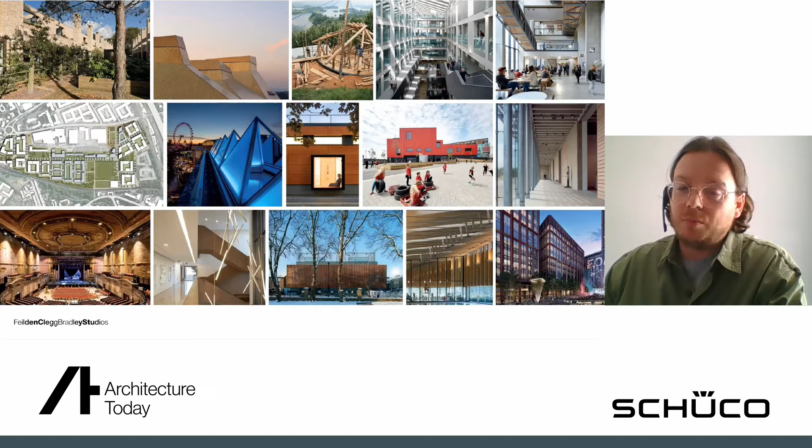At the base of our design, there has always been an eye on low energy design solutions in terms of our buildings, and more recently we've been striving to integrate passive house into new schemes that are coming forward since the declaration of climate emergency. And we've also used our in-house tool, which we've made open source, called FCBS Carbon, which enables us to analyze embodied carbon and operational carbon at an early stage. So as I mentioned, this aligns with our declaration as part of the climate emergency and being one of the founding members of UK Architects Declare.

And this leads us into South Hill, really, which is a relatively new project that came in last year, obviously having strong aspirations to make this a design scheme that is responding and addressing those missions that we've set ourselves, and doing that with a client that is interested in doing so also. The client is Jersey Development Company. They are part government owned and therefore have a very strong mission and response to the climate emergency and environmental strategies that they want to employ on the island in setting a new benchmark for housing with this scheme. And we're supported on a core team by Gillespies, Waterman and Etude in terms of landscape, engineering and passive house respectively.

So the site sits in pink here. It is surrounded by the mount and in the former quarry that is kind of renaturalised, and that green fringe traces up the Glacis Field, which is this park lawn that runs up towards Fort Regent, which is a listed place. This is then bound by harbour walls and sits at a kind of mid-level between that fort and upper level and down to the harbours below, which again are listed places.

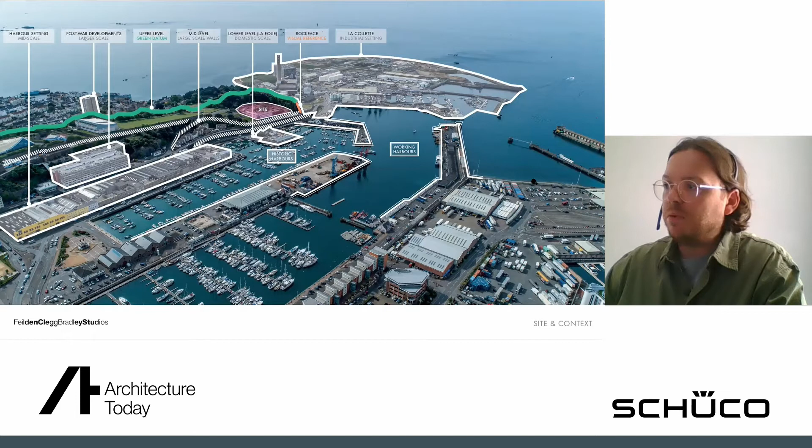On top of that, it then also sits within the working harbours and the industrial land reclamation beyond in La Colette, and amongst a mixed scale of buildings in terms of domestic, mid-scale and sort of newer, larger scale pieces. So quite a difficult place to respond to in terms of satisfying all the different contextual pieces that exist there, but something that we've enjoyed doing in a landscaped fashion, given it's bounded by that rock face and well naturalised in terms of its greening.

And therefore we see it as being not necessarily an urban piece, as you might get in St Helier Town Centre, and actually more of a landscape piece that evokes the thoughts and feelings of the quarry, the rock face, and it can be something more embedded within that natural landscape and greened up to renaturalise and soften the edges as is at the moment. So our response to that was to reinstate the quarried landscape, if you like, and start to recarve.

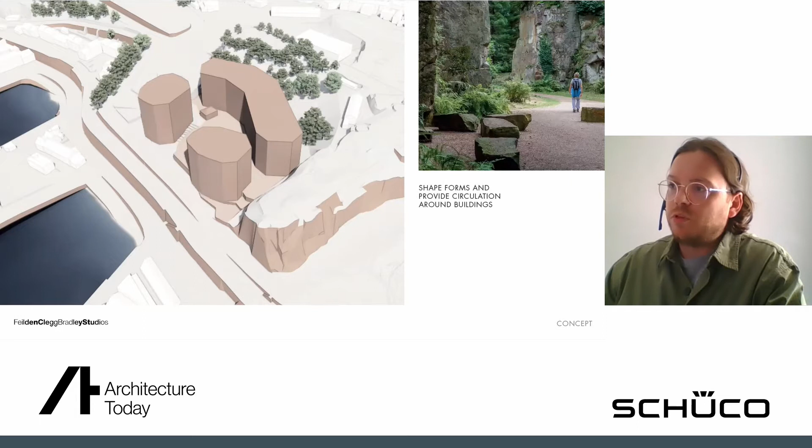The first move was to bring through the harbour in front of the site and create a courtyard space that retains the listed building and starts to open itself out at the back to bring in that view. Then it was about creating an axis on the key views, so bringing in Fort Regent above the Glacis Field, as it's known, and down to Mount Bingham, and having that creation of 3 buildings around a courtyard and listed building. Then we shaped those buildings and set them back to allow for circulation and public realm across the front of the site, around the buildings and through the site into the park.

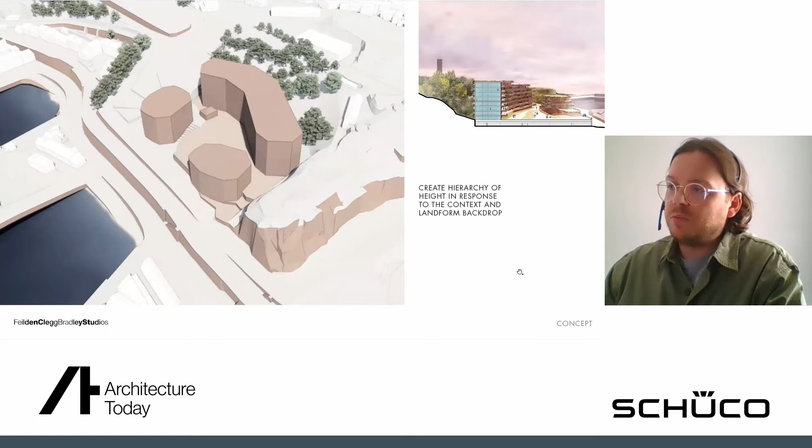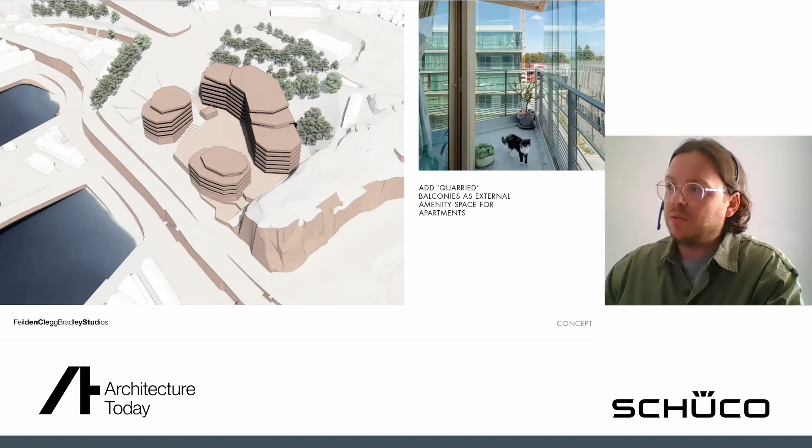We then set some of the buildings down on the front to respond to height and create a hierarchy across the site, and also in relation to that backdrop of trees to the rear eastern boundary of the site. We further manage that height by introducing setbacks at the upper levels, which also enables us to offer terraces to the apartments at those levels. The architectural character is then added through an overlay of quarried horizontals, if you like, which start to offer space and external amenity to those apartments through balcony spaces.

And then the character is developed through a shifting and folding of those balconies and edges and facades to evoke the geological formation of the granite and rock faces from the mount itself. These are then softened through a series of planted pieces through green roofs, planters to the balcony edges, and obviously the landscape in the courtyard and replanting of trees to the tree line beyond as well.

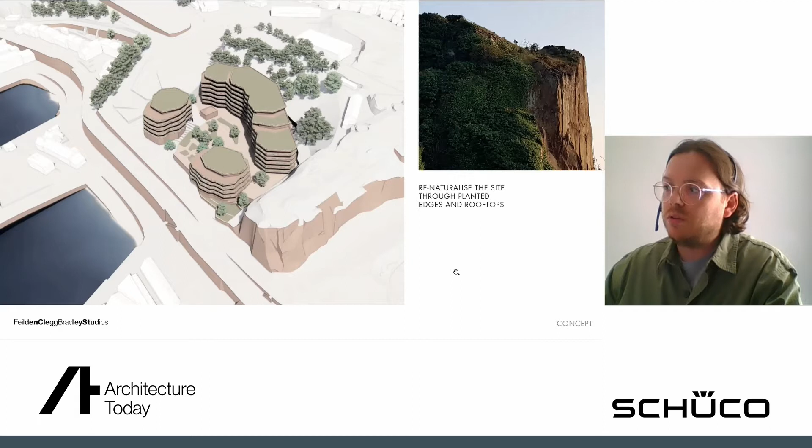So this led us to our current scheme, which is pre-planning, I should say, and involves 3 buildings. So the Crescent building to the back, which maximises that westerly view, which is the key viability driver for the project in terms of getting apartments to maximise that view out across the harbours and the bays. And then 2 smaller buildings that frame the site and reveal the open courtyard and Belvedere moment, if you like, from the front, also to that view.

The North Pavilion has a ground floor cafe, which spills onto a sunken terrace, and that wraps up and relates through to the park, which is intended to be refurbished and re-landscaped into a sculptural play park, creating more of a destination piece and link back from the town and Fort Regent area. In terms of materiality, we're building on the reference of the rock and the granite, but looking at something more contemporary in terms of a GRC or a pigmented precast or terracotta, and how we can then plant up those facades and faces to soften them with landscaping to renaturalise the quarry as it is at the moment.

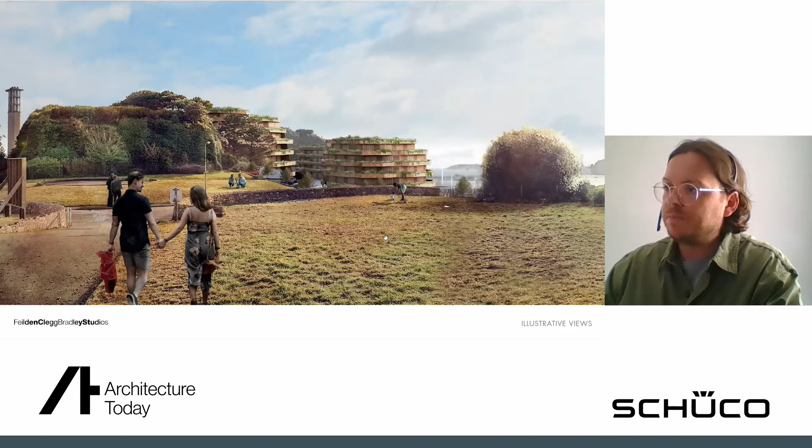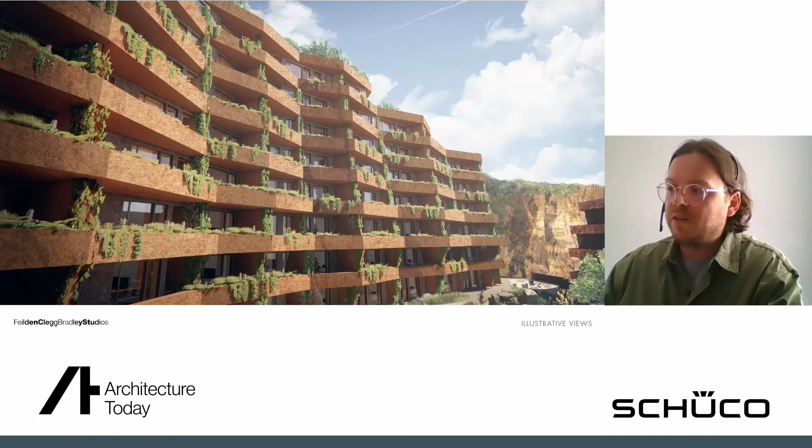And obviously in this pandemic, or hopefully post-pandemic world, we're still thinking with an eye on that in terms of how we can respond to people living even in a standard, relatively small 1-bed apartment, and how we can offer them different areas to touch down and work and dwell in a lockdown situation, whether it be in the bedroom, in the lounge, on the balcony, or in between spaces on breakfast bars and the like.

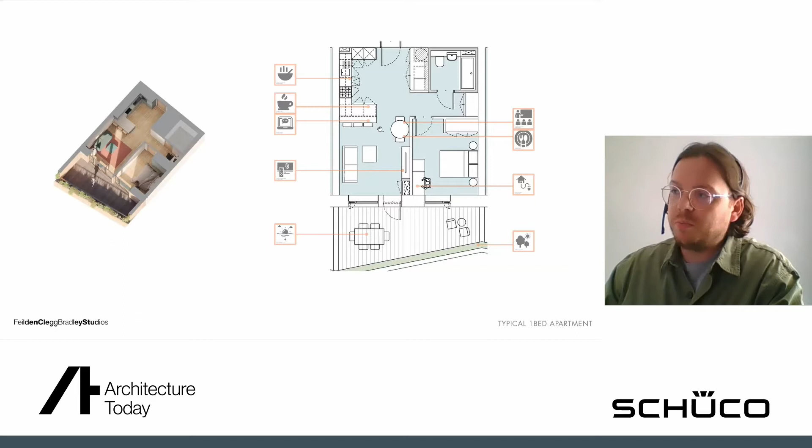The character of those apartments is obviously driven by the view out, and we've used the thick thermal line envelope, which we've developed with the Passivhaus strategy, and sleeved it with a timber lining, which reveals that. And also, maybe we can offer a window seat in that window to offer another place to dwell within the apartment, with the balcony then offering the big panorama view out over the bays.

So in terms of Jersey targets for the environmental and climate agenda, they've set out a strategy to get to 2030, of which our project obviously sits inside. And they have some quantifiable targets for operational energy. They want a plus 70% improvement on current trends. In terms of embodied carbon and fabric, it's a bit less quantifiable, but there are ambitions to improve the energy performance of buildings through fabric and technical design policies. And that's where we've started to look at bringing our own quantifiable targets in to support these carbon neutrality strategies.

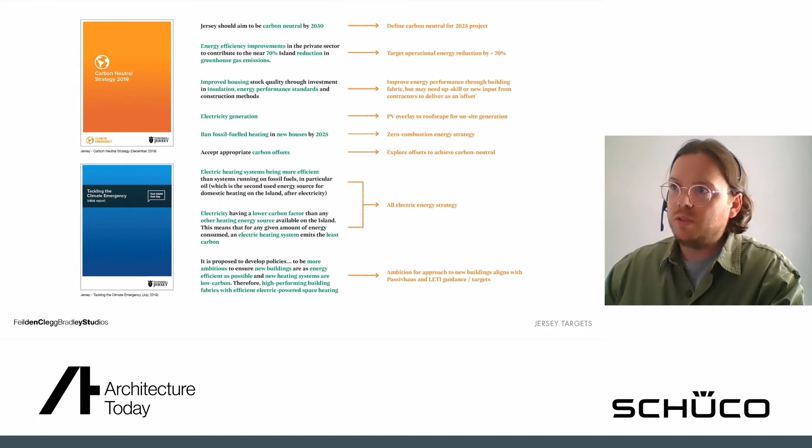So in terms of embodied carbon, we've used our in-house FCBS carbon tool and set ourselves against current standards, so maybe a building that we or others may have designed without a mind on embodied carbon or material use. And then we've set our goal against LETI and the RIBA climate change challenge for 2030, that being a building that is less than 500 kilograms of CO2 per meter squared. And currently, we think at this early stage we can sit on the threshold of the 2030 RIBA challenge, given that we'll be delivering in the 2025 zone.

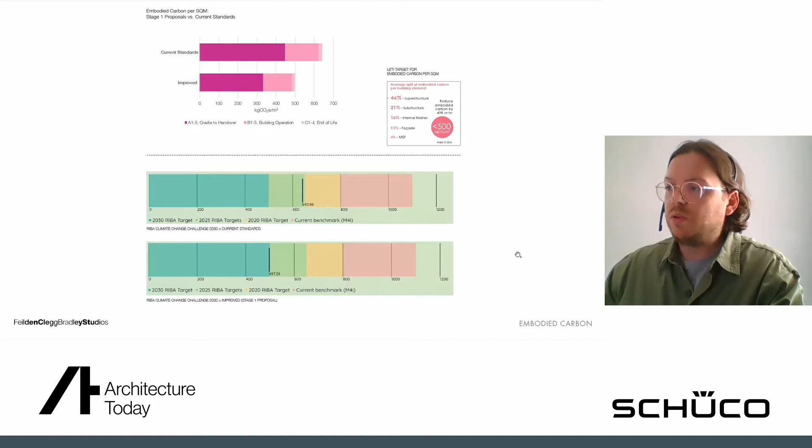Similarly, with operational carbon, we've set ourselves against current standards, so Part L or Part 11 on Jersey, and how we can seek that 70% improvement. And that leads us to believe that we should be targeting a passive house and LETI kilowatt hours per meter square per annum target. And again, early studies show that we think this is something that we can achieve.

So some of the methods across the building that will enable us to do that are obviously that thick thermal line and simple form that I've already mentioned, and within that having triple glazed windows to minimize heat losses, but with openable windows for purge ventilation and cooling. And then the balconies are thermally broken and offer solar shading, whilst integrated finishes to that balcony structure reduce material use.

Servicing: MVHRs to provide background natural fresh air, water saving utilities, zero combustion and all electric to all fittings, and heating fed off an air source heat pump on an ambient loop through the buildings and then boosted in the apartments where it's needed, with a view that heating should be minimal given the thermally efficient and airtight external walls.

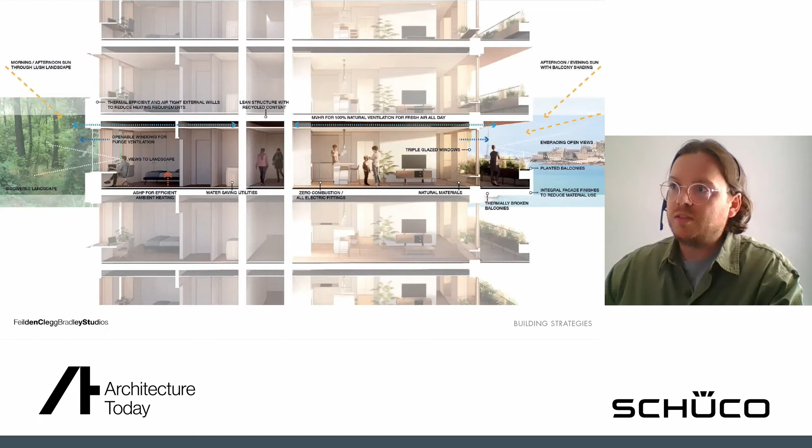And then stepping away from the buildings into the wider picture, we also frame our designs within a One Planet Living framework, which has 10 categories, of which one is zero carbon, but also 9 others that cover other areas, from health and well-being to land and nature to travel and transport. And this enables us to look beyond the private sale of the apartments, and also think about the public interfaces and engagement with the site, given the ground floor cafe, listed building, and the park, which form part of the proposals too.

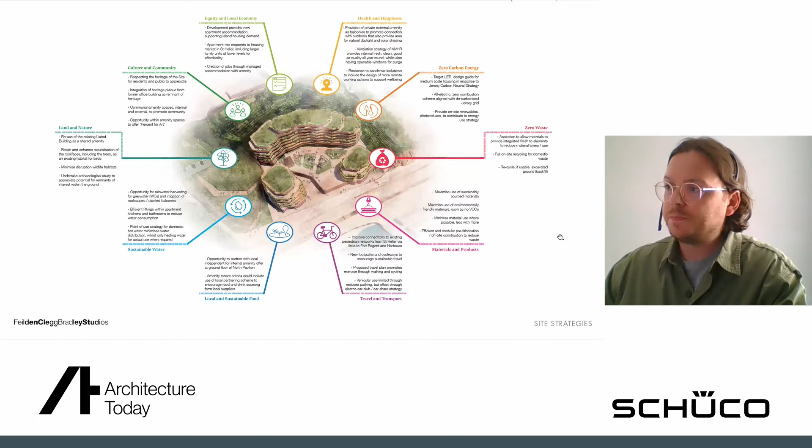So we believe with the planning requirement of BREEAM as a design-based tool, the holistic look at the site and proposals in general, using the One Planet Living framework, of which zero carbon being a focus, to give that holistic approach. And then also plus the overlay of Passivhaus as a delivery-based item, we should really get a real comfortable feel on having a sustainable and exemplar piece of architecture.

So working with Etude, we've contextualized the building in terms of how it sits against Passivhaus requirements. Maybe not the best, given that it's hugged on the southern face by the Mount Bingham in terms of its context, and obviously wanting to maximize that westerly view out, which is at risk of overheating, for example. But working with them and PHPP modeling the scheme from early stages to try and get to something that we think is achievable.

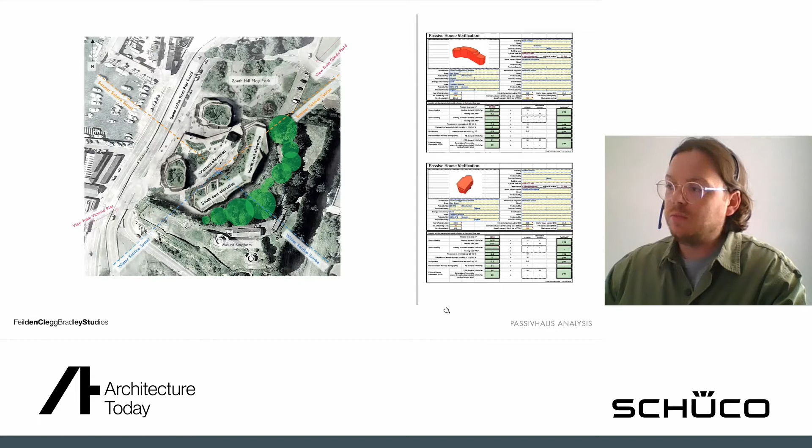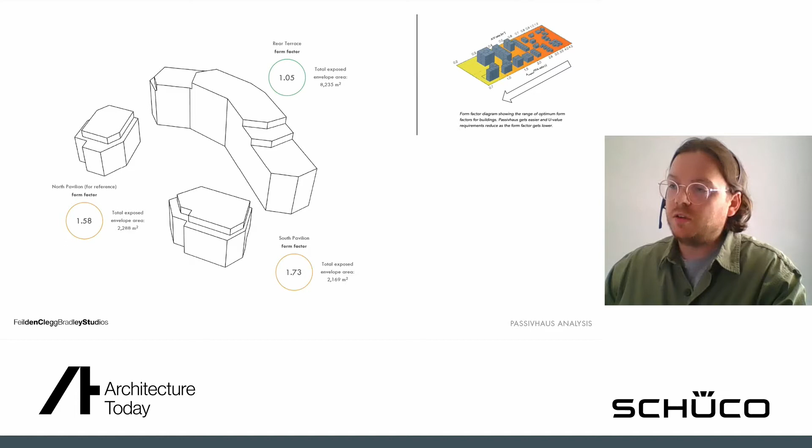So in terms of form factor, I mentioned that simple thermal line earlier, but pretty good in terms of the rear building, in terms of being below the 2.0 threshold, given the amount of density that is in that building. The pavilions being slightly lessened in terms of where they sit, but still below that 2.0 factor. So giving us a good sense that this is something we should and can target.

And the key tension really for us has been sat with the glazing. You know, architecturally and in terms of viability, it's something you want to maximise to get that view, but not necessarily to the facades that can potentially suffer under Passivhaus standards. So aiming to achieve Passivhaus Classic across all buildings.

This initial assessment by Etude and the PHPP model led us to believe that the west elevation could have 30% glazing, and the pavilion buildings, given the reduced form factor, could be 15%, which is obviously slightly less generous than we may have wanted. But we accepted the challenge. We started to model that in some design scenarios against the 1-bed and the 2-bed typical units. Started to understand how we could break down that glazing against what we wanted to have in terms of doors onto balconies and then windows from habitable spaces, and how those modules might be replicated across for efficiency.

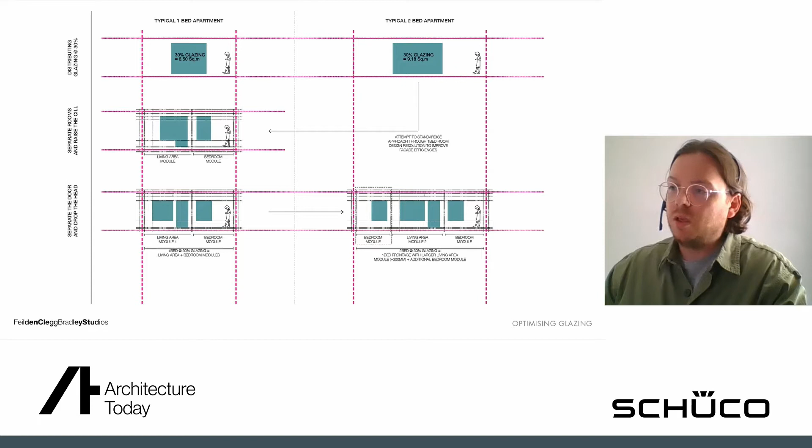And where we ended up, obviously, is a departure from where we started. So getting rid of the floor to ceiling full height glazing, which is obviously a benefit in terms of Passivhaus and threshold details, but also having to reduce down the head height of the window, if you like, and the width, which is slightly more at odds with the viability of the scheme. Similarly, in the living area, giving more of the ratio to the living space as the key primary habitable space, but still reducing down that head detail and also the width of the window in general.

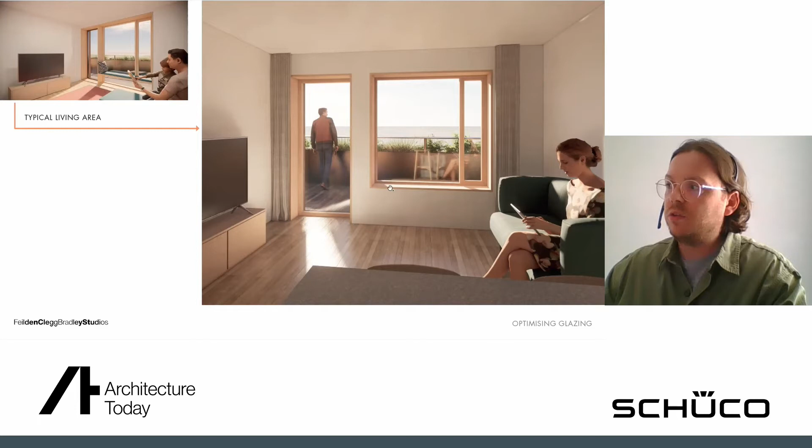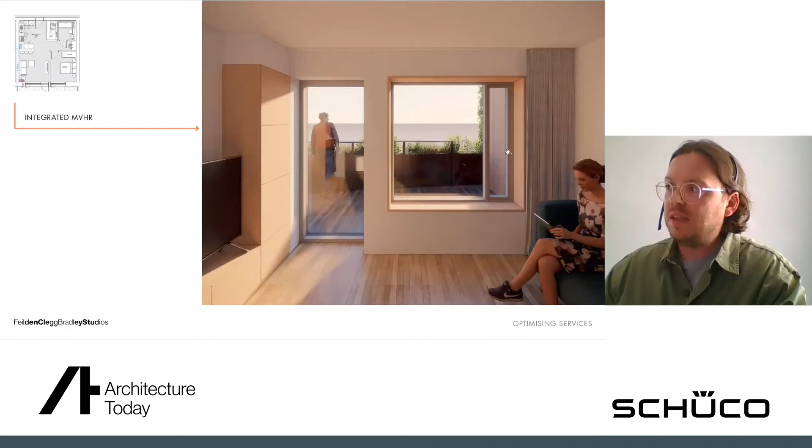Then the other challenge was to also look at the MVHR being integrated on the external wall, given the heat loss that the ducts can create. And that was another challenge that we took on and started to look at how we could utilize a piece of joinery that could also double up as storage and contribute to planning requirements, and how that could sit within the sleeve timber windows as a timber piece.

Unfortunately, that was at odds with daylight sunlight and the Passivhaus modelling, and there were some failures in there in terms of daylighting, and also the viability of the scheme in terms of that west elevation requiring an uplift in glazing ratios. And what we found upon reassessment, with more detail coming forward as we move into stage 3 pre-planning, is that for the rear building, given its good form factor and density and other strategies, we could increase that western elevation and retain the north, east and south as they were, to bump up the glazing ratio.

However, on the pavilion buildings, given that they were so constrained before, we've now looked at a Passivhaus low energy building standard, which has an increased space heating allowance, but still an improvement on the Part 11 or Part L current standards. And this has really enabled us to push those glazing ratios up to achieve the viability that the client needs in terms of the apartment sales market, but also addressing the failures that we were having on the daylight sunlight.

So going from the sort of second iteration of the apartments, if you like, we've revisited them again and found that the increase in height and width of a window in the bedroom starts to balance the Passivhaus Classic on the rear building and the low energy building on the pavilion buildings, whilst also boosting the sunlight daylight assessments and the viability of the apartments.

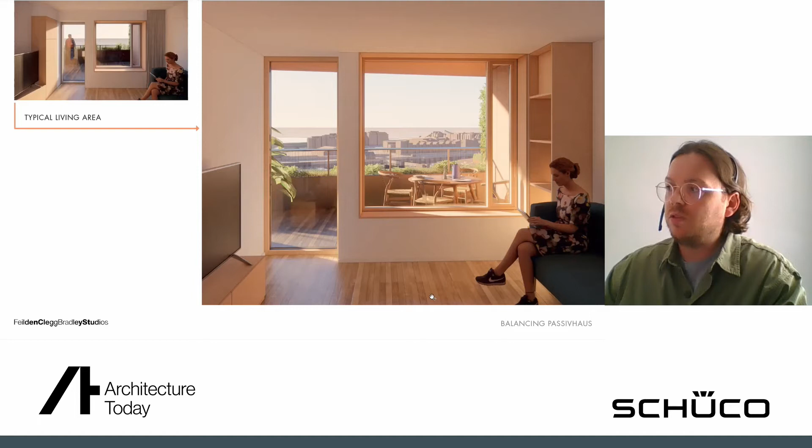So what we found really is that the most important themes to consider early on is how the glazing and the balconies interplay in terms of optimizing solar shading, overheating, maximizing that viability of view, and also the Passivhaus requirements of heat loss and heat gain. And that obviously depends on the plan layouts as well and the servicing strategies.

But I think for us, the biggest learning curve that we're maybe not always afforded is time for this non-linear process to come back round. We're on our third iteration now to try and balance these things that are all competing with each other, but starting to get somewhere that is hitting that sweet spot between overheating, daylight sunlight and Passivhaus, all couched within the bigger picture of viability for the client.

And ultimately that requires collaboration and understanding to enable that, and it's something that we've been lucky to have with the team and the client that we have for this project.

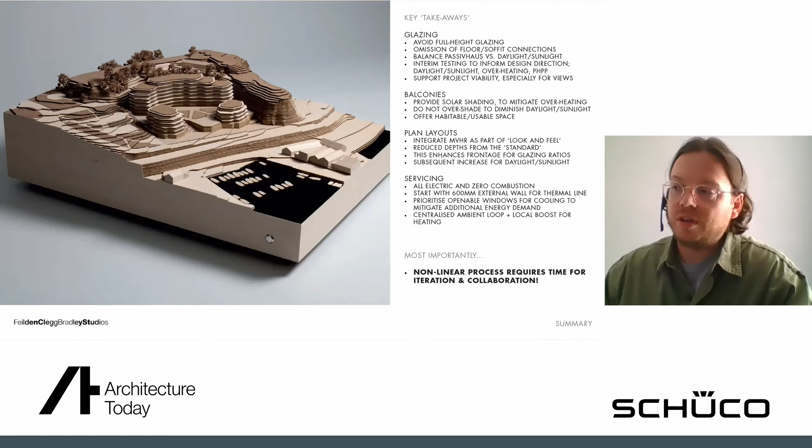We've got lots of questions coming in, but I'm only going to ask you one now, and then we'll go to others later. And I guess it's around the awareness of Passivhaus within Jersey, and as a corollary, do you have an understanding of how much this will be a selling point for the apartments, and maybe this allows them to be sold for a bit more, and does that pay for some extra costs?

I think it's an interesting question. I think we're all sort of getting to grips with Passivhaus as an industry, so I'm sure beyond the industry, it's still quite a new thing to a lot of people, but it definitely does contribute to the market value in setting a standard, and being able to have something certifiable, which I think is one of the key benefits really for us, in terms of it's something that is delivered and quantified, and it's not just a checklist beforehand. It's a definite pass and fail.

But I think in terms of Jersey, it isn't mainland, it isn't UK, and they may be slightly behind in terms of their policies and their uptake on things. But saying that, they have got their carbon neutral strategy out there, and I think we're just trying to support that really, and upskill ourselves and the client and the island itself in terms of that residential market.

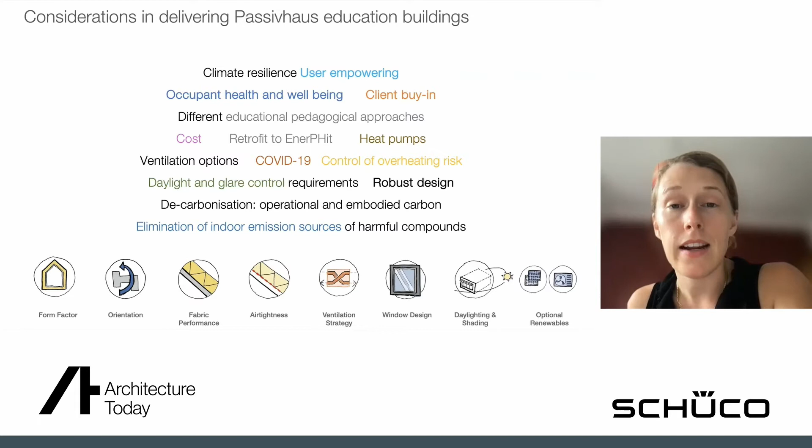There's a huge amount to consider just generally in educational design, and a lot of these come to the fore as we're now looking at a climate emergency situation in relation to energy consumption. And we'll touch on some of these today as I show you 2 key examples of this in terms of new build and retrofit. But you'll see a number of themes there that have been recurring over the last year in particular, regardless of whether it's a Passivhaus project or not. But the big challenge, I think, and the big enabler really for us in Scotland has been around some of the policy changes and the policy ambitions set by government and local authorities.

But if we set a target about being net zero carbon by 2030 or 2045, we have a theoretical understanding of what that is, and we can model in design terms what that is. But the reality of that, and this is where there's a huge, huge risk to the industry and to our target emissions, is the performance gap that will prevent us getting there in reality. So the unregulated energy demand, the poor quality construction, the lack of understanding on how to deliver a robust set of thermally and air tightness proof details will be a big, big challenge to us. So on paper, we'll look like net zero carbon, but I think it'll be terrible post 2030 in reality if we haven't really met that. And we still have time to try and achieve that through our projects.

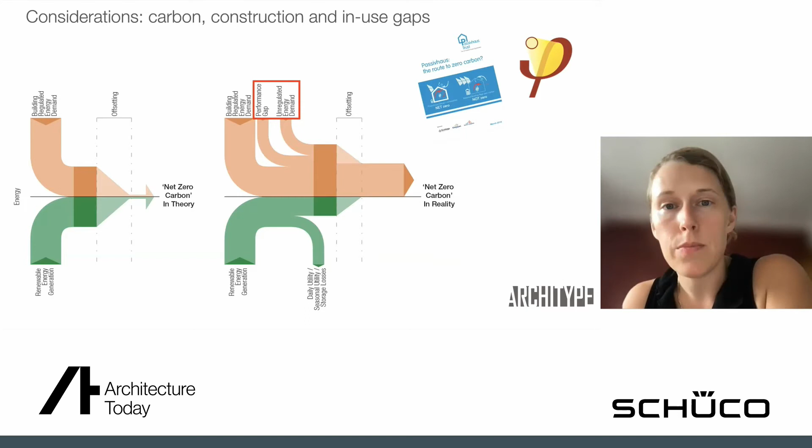Passivhaus Trust and Passivhaus generally as an energy standard provides a really quality assured methodology to achieve that in our view. And why would we be skeptical or cynical about trying to design better quality buildings? I often use the analogy of a car, which is ironic in the current circumstances of trying to be greener. But if you had a car and the air conditioning didn't work or the draft proofing was failing around the door, you'd return that car to the garage, or at the very least you'd get it fixed. We design buildings and we don't design them as fit for purpose items or quality pieces of infrastructure. And really, we should all be demanding better from ourselves as clients, as design teams, as the industry to deliver more high quality buildings that will create significant emissions savings.

And how we do that is through a collaborative effort. We know that the construction industry can be set up in a bit of an adversarial manner, but what we are really looking for is a new way forward, a new normal, as we've been used to hearing over the last year or so. So how do we approach school design? It's a very cyclical approach. It's very process driven, and we really integrate the PHPP or the Passivhaus design tool within the RIBA workstage process. And we know that the plan of works is leading us towards more compliance checking in sustainability targets anyway, but I think it's really embedding that into our workflows that is really, really important.

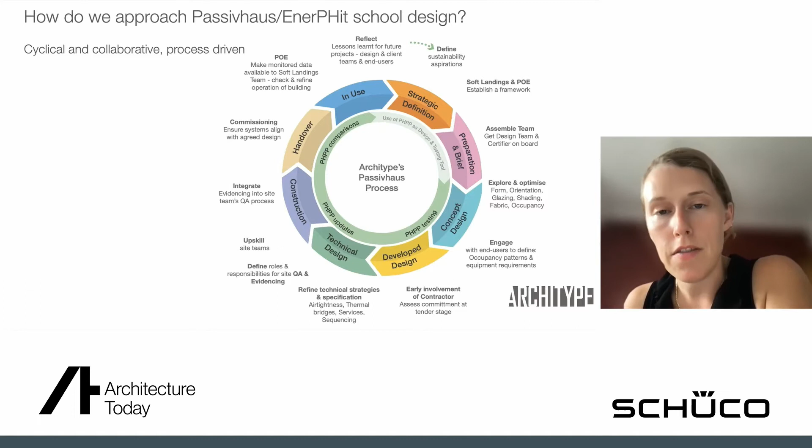So everything from defining the brief and setting up the right level of communication with the right people at the right time, following that all the way through to commissioning and post-occupancy to then feed into the next project. And it's that feedback loop that's really critical to us. A real enabler in Scotland has been the Scottish Futures Trust response to previous government-funded school programmes, and with the current one, the Learning Estate Investment Programme.

Of course, the big debate is around costs and Passivhaus costs. And we've done various studies and worked through elements of certainty with different design teams now around it not having to cost any more. So, cost is a matter of priority. And I feel, and we've seen, and it's been proven that, it's really about that collaborative relationship with an understanding and informed QS that knows what they're pricing, that understands the approach that we're taking.

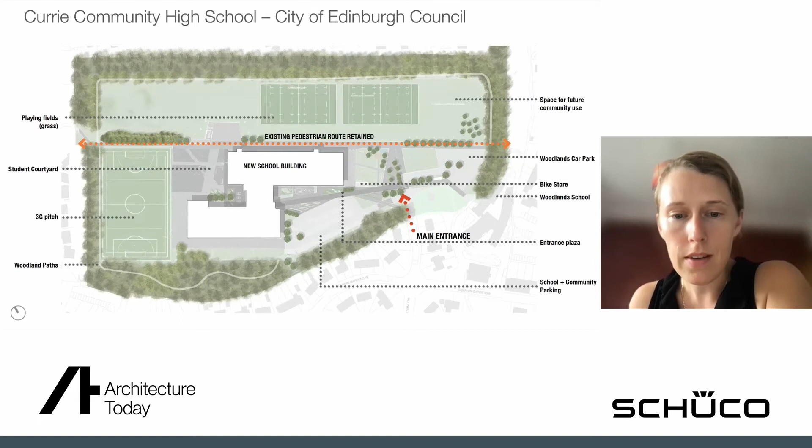The massing of this project maybe isn't what you typically expect of Passivhaus. It just goes to show that we can have slightly more complex form, which is driven by architectural pedagogy and community requirements, and still be able to achieve Passivhaus, which we'll go into in a little bit more detail.

So we have the teaching block to the north. We have a community link that houses the library, cafe, entrance point and wayfinding point for the people that are entering from the east side. And then we have the sports and leisure facility to the south, which was driven by the requirement to have a little bit of solar gain into that swimming pool, which I'll come back to later in relation to Passivhaus.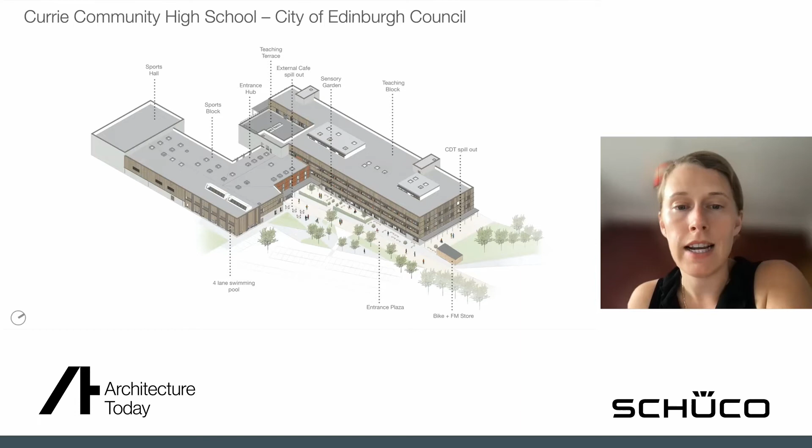There's an external teaching terrace, and there's an encouragement that the students in the curriculum will apply the awareness about sustainability in the project as in their school education as they move forward. In terms of material palette, we're looking at very natural, low VOC materials and a very calm palette. Some of the post-occupancy evaluation of our schools has been how calm and ordered the space feels, and that there's not a distraction to education. I think we really want to hang on to that simplicity of approach for Currie as well.

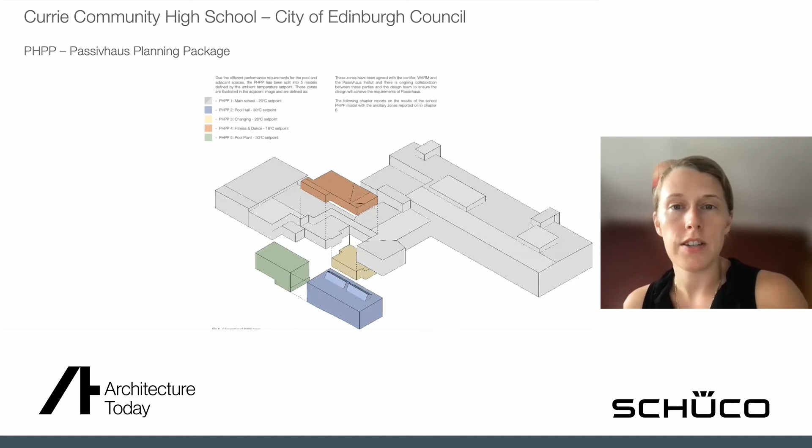In relation to PHPP, so the Passivhaus planning package, this is just a diagram to explain how we look at the energy modelling. So I know your services engineer will have their IES energy model that encapsulates the whole building. In the Passivhaus modelling, we look at boundaries slightly differently. So we actually have 5 PHPPs running for this school to denote the different temperature and comfort conditions. They all have slightly different requirements in terms of complexity.

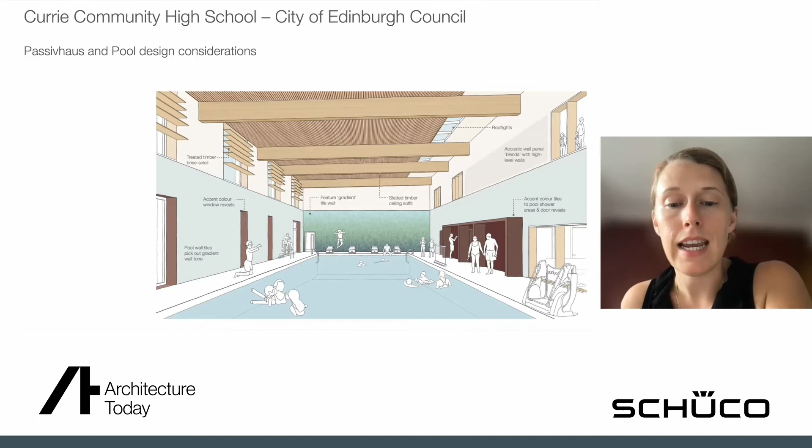And then it's very important that the plant is located as close to the deep end and where the balance tanks are, that the plant for the pool itself then isn't put miles away from the pool location, because as you can imagine, it's a body of very warm water, and the energy required to keep that warm and to pump and filtrate that water needs to be as efficient as possible. So that was really key in some of the development of the plans for this pool.

In relation to just the form and approach to the energy balance with Currie, these are just some summary examples of the elements that we look at each iterative design stage. So in that cyclical approach we talked about, very early on we're identifying what the form factor of the main school is, and that then means we don't need to maybe go to 0.15 or less U values. We can take an area weighting benefit from the large form factor and the large surface area to volume ratio and the efficient form factor of Currie as it stands.

The glazing ratios aren't the idealized glazing ratios for a Passivhaus building, but we have teaching areas to the north, so we need to make sure we adequately glaze those teaching areas and classrooms that are facing north, as well as making sure that the south facade has adequate glazing as well, so that we're not in any compliance issue with climate-based daylight modelling or any other ventilation or natural ventilation requirements that we're setting in the building. And we've stuck for the moment with quite standard triple glazing values, which we expect may develop as we move through the subcontractor or supply chain process.

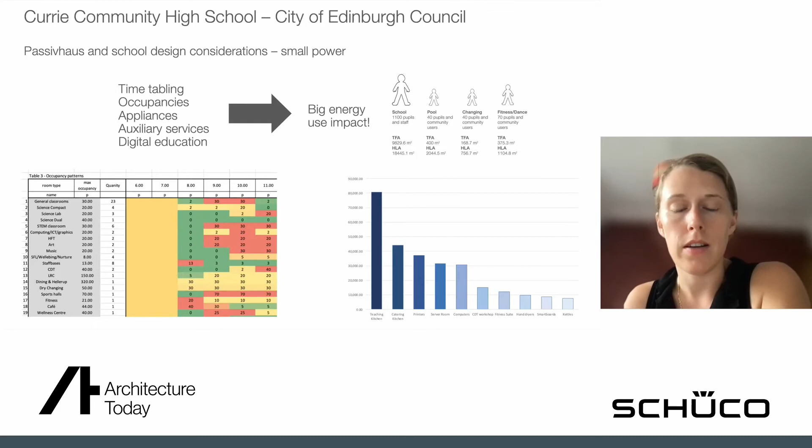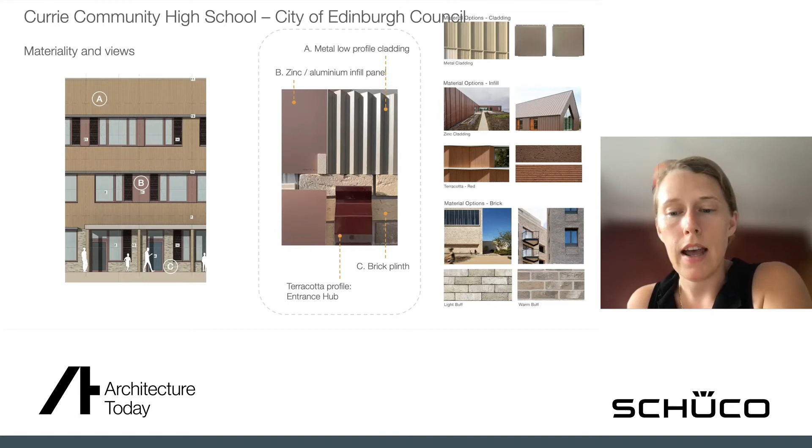So that unregulated energy demand and then that expected energy demand from different parts of the school. So we go into that in quite a lot of detail. In terms of materiality, we're looking at low profile metal cladding with a brick plinth that follows the building around and exposes itself at different points.

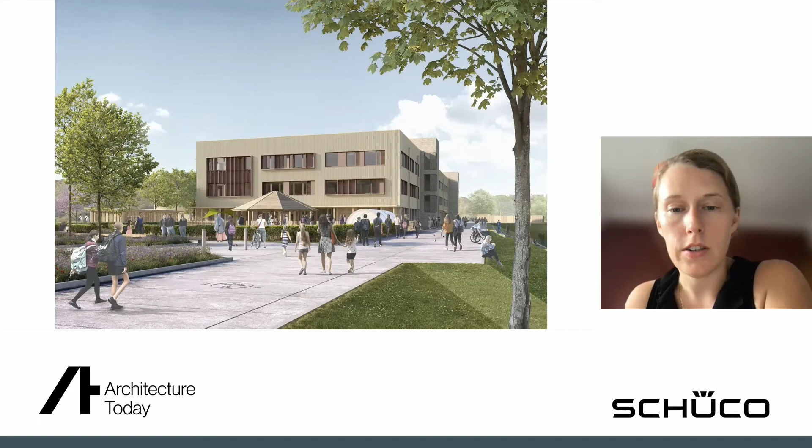And again, this is just an alternate secondary view from that eastern entrance. And you can see that there's been glazing and shading considered on those elevations. That's our south elevation there. We have our east and west elevations with slightly reduced glazing and also appropriate shading to ensure we don't have overheating.

So that was Currie, just as a story, and hopefully that's going to site early next year in the springtime. So it's really exciting, the biggest Passivhaus project currently in the UK, educational project at secondary level, which is really exciting.

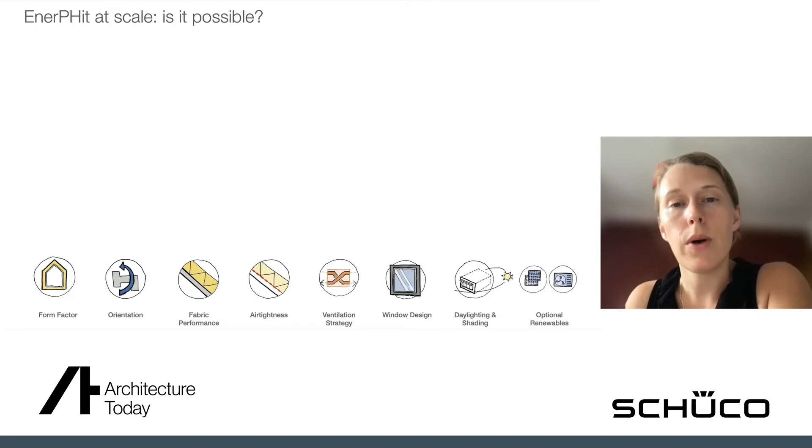The other thing I want to touch on briefly was just EnerPHit. There's that question out there, is the Passivhaus EnerPHit standard possible at scale? And currently, as an example, we're delivering with a number of other partners the Cambridge Institute for Sustainability Leadership, which is a full-blown EnerPHit project underway currently in terms of enhancing and retaining the existing envelope, but creating a really strong, comfortable environment internally and getting full certification for the EnerPHit standard, as well as looking at lower embodied carbon materials. So that's currently on site and going quite well.

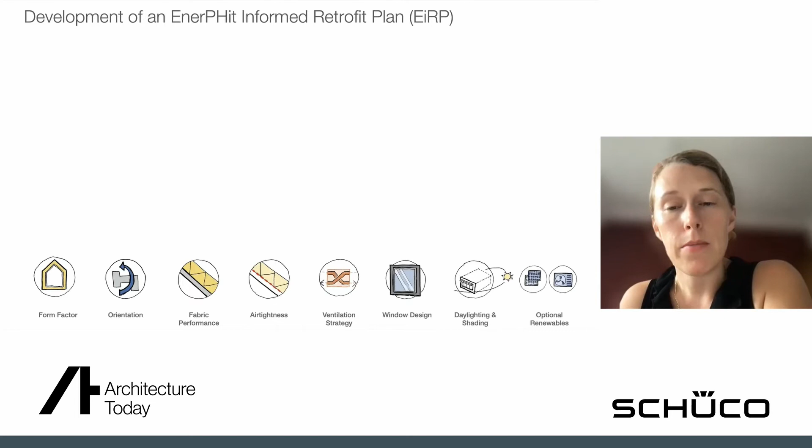And then lastly, I know we talked about new builds in City of Edinburgh's new plans. City of Edinburgh have also expanded on what their challenge is around zero carbon by 2030. They realise they actually have to address the current existing building stock and how they physically implement that. Where do you start? It's such a huge challenge. There are buildings built in different eras. There's also different typologies of buildings. So there's a huge asset management review that we're contributing to, that we're feeding into.

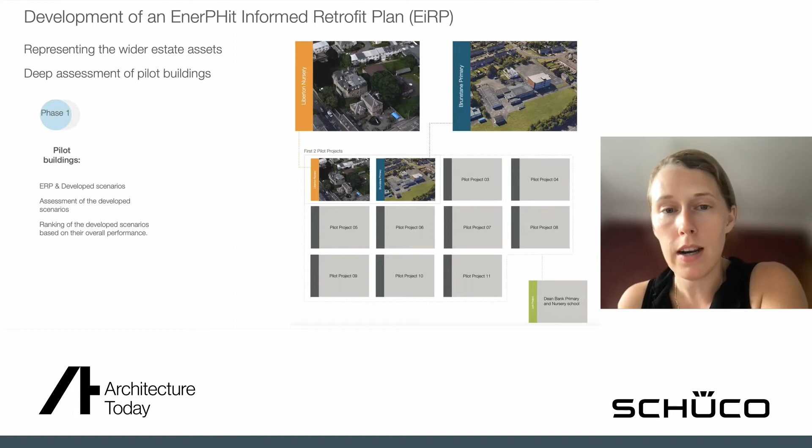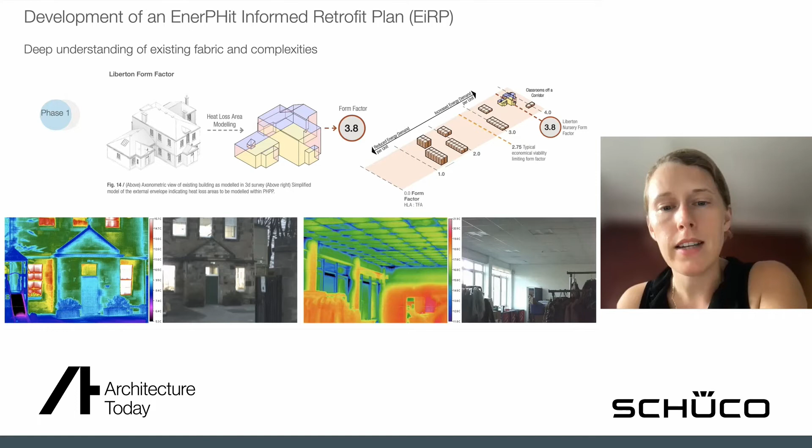And the first step in that is to actually start doing some deep dive pilot study assessments. So we're looking at about 12 pilot projects with them to see how feasible it is to get down to a level of retrofit that would bring them closer to that zero carbon target. So again, we're looking at modelling heat losses, getting air tests, doing opening up works, getting thermal imaging surveys done to really understand the building. Because, especially if we're dealing with heritage buildings, it's really important we get a really good grip on what we're trying to achieve.

And we have a summary there just on the right of one of these nursery schools in Edinburgh as one of our first pilots, of how poorly insulated it is, very poor air tightness and substantial thermal bridges, and the other constraints around trying to retrofit this project.

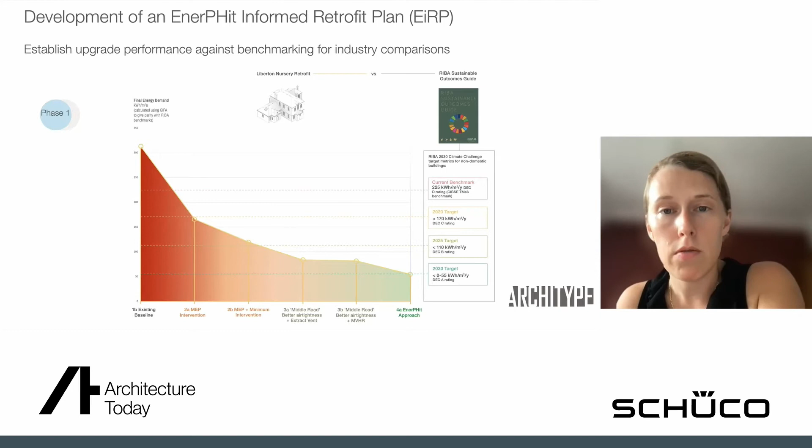Without going into too much detail, this is just an example of our interventions that we're proposing benchmarked against the RIBA Sustainable Outcomes Guide. So really by the time we get to a middle of the road retrofit, an EnerPHit informed retrofit, option 3A or 3B here, we're really quite close down and beyond the RIBA 2025 targets for new builds, which is really exciting. And refurbishment is really the way forward, that Retro First campaign that we see run by the AJ and others.

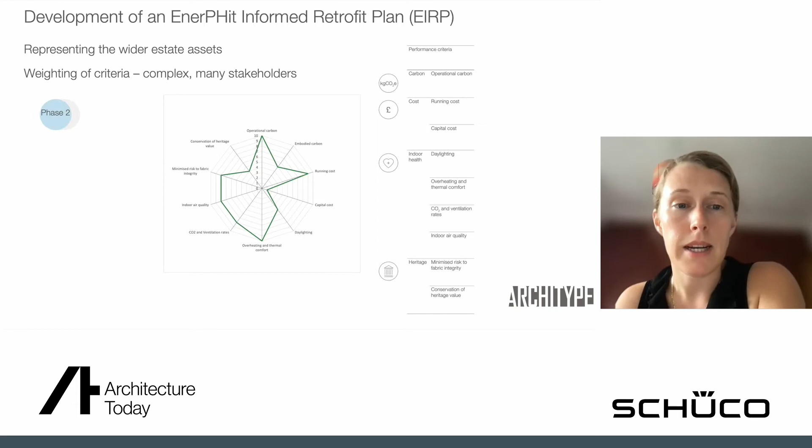But also it's a complicated process. So how do we enable a client to have appropriate decision making or frameworks in place to allow that implementation to happen? And so we've identified various factors around cost, carbon, indoor health, and also heritage value that we need to be able to enable a client to make decisions on to allow that process to really be implemented for

2030. So really where we need to go from is the recognition of need to promote refurbishment, to actually enabling a framework to allow those targets to be actually achieved and benchmarked against the wider net zero carbon challenge, and create an informed, robust methodology, which we believe Passivhaus, as a methodology that's already proven for 30 years, can provide any client in that compliance path.

And just to finish off, in the past, we treated buildings very differently. It was a very elemental approach. We had less technology. Currently, we're in this race to net zero carbon. We have this era of energy confusion. What target are we aiming for? How do we understand the target? How do we implement the target?

And lastly, just to finish, we feel Passivhaus, its fabric-first approach and simplicity in approach to design should be driving that new architectural vernacular that we should all be trying to adopt to create a simplicity in trying to achieve these ambitious targets. Thank you.

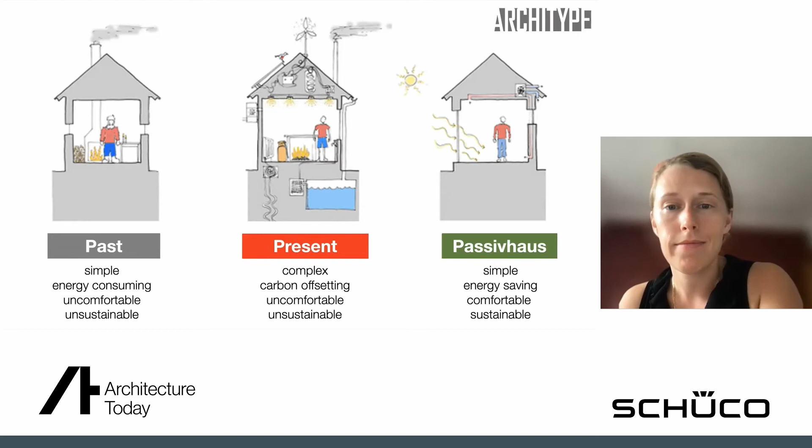Thank you very much, Anne-Marie. I think it's really interesting to see how Architype is moving from simply, and it's not that simple, having the understanding of how to design first low energy and then Passivhaus buildings, into that point of actually working out how to persuade others of the merits and explain exactly what's happening.

And I guess that's where I want to come to, because you showed us some cost information at the beginning showing that certainly in Scotland, Passivhaus sat within targets. But then you showed us the school, which was a less simple form, as you said, than one often thinks is needed for Passivhaus, plus the challenge of the swimming pool. And I just wonder how easy you're finding it at the moment to actually persuade clients and potential clients that they can go with Passivhaus, given the fact that education spending seems to be about the most constrained spending that we have.

Yeah, absolutely. I know the metrics between Wales, England and Scotland for spending on schools, there's a wild variation in what those cost metrics set and what the expectations are. I suppose the Currie, due to its educational pedagogy, had a certain drive, and of course the relationship with landscape and outside learning. We couldn't just design a simple box on this site where the first principles would be try and keep the form as simple as possible.

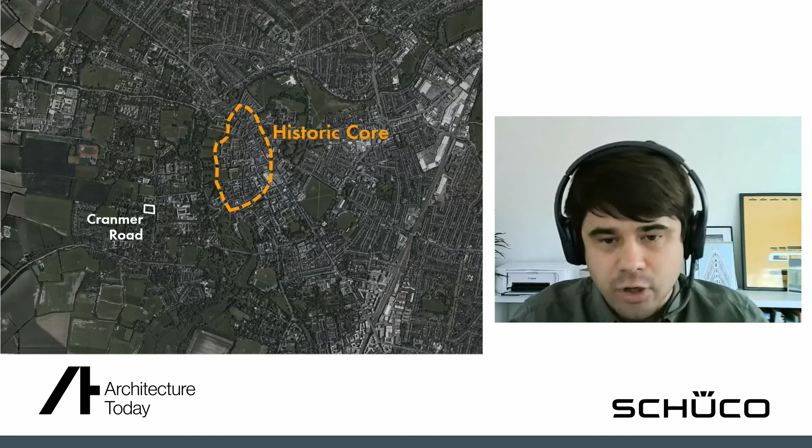The site itself sits to the west of the historic core of Cambridge, around a 5-minute walk from King's College's main campus. King's College is client, owner of the site, occupier of the site and developer for the project, and as such, as well as being concerned with the capital cost of the project, they also would like low maintenance, robust and long lasting buildings, and they're interested in value for money over time.

Their primary role is to provide support for the students living within King's and studying within Cambridge University, and as such they've got a very important pastoral role as well as a custodial role for the buildings that they own and operate, and a desire to create a collegiate environment within which students can flourish. As such, they're interested in buildings that they can be proud of, spaces that are conducive to learning, and they really want to create a sense of community for that graduate community living on site.

So the brief that we received at the start of the project was for a unified graduate campus working to a 100-year design life, creating really robust, long-lasting and high-quality buildings, very healthy spaces for people to live in and value for money over time. But what's interesting in this case is that there was no requirement for Passivhaus at the outset of the project. It was actually something that we came to at RIBA Stage 2 as we worked through the project and the brief, in particular looking at this challenge of a 100-year design life and what value for money meant in that context.

So at a very early stage, we undertook a lifetime cost assessment looking at 3 environmental options: a building regs compliant option, a general low energy approach and a full Passivhaus approach, questioning what the implications of these different environmental strategies would be on the performance of the building, the construction of the building services, the lifetime of components in the building, the professional fees and risks.

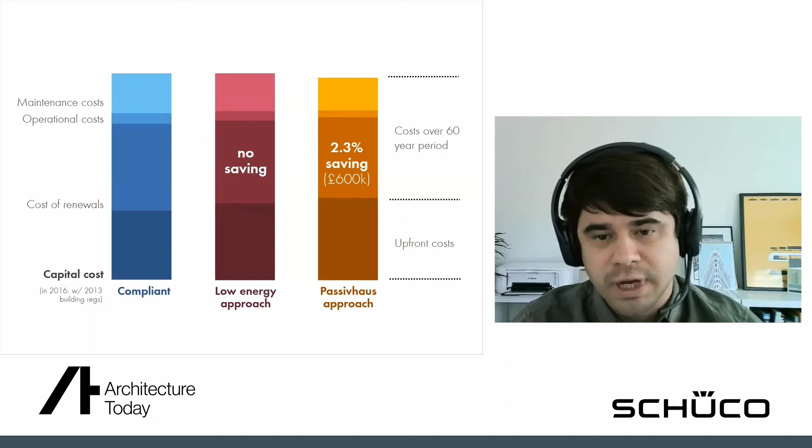meaning that capital costs were recovered after 25 years, cost benefits were realised after 30 years, offering many, many years of value to the college as a whole. And on this basis, together with the qualitative benefits that come from a Passivhaus development, the client was happy to proceed on that.

What we've seen subsequent to this is that actually the cost impact in terms of capital costs has come down with enhancements in regulatory standards and reduction in the perceived risk within the construction industry, reducing capital costs further. The Passivhaus Trust estimated in, I believe, 2019 that for all types of projects, Passivhaus represented an 8% uplift, but we found in very comparable projects in Cambridge recently that there's no significant difference between the capital cost estimates for building regs and for full Passivhaus projects.

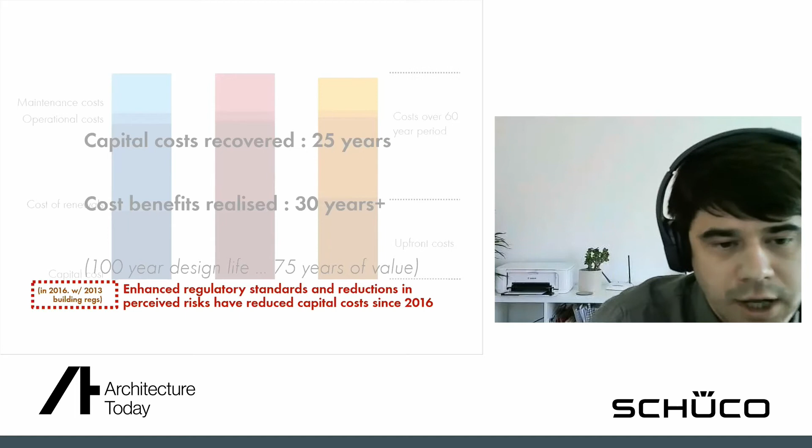So we see that cost issue going away, not offering a significant impediment to a wider uptake of Passivhaus as a whole. So as I said, on the basis of our lifetime cost assessment, Passivhaus and a direct electric heating and hot water strategy was added to the original brief.

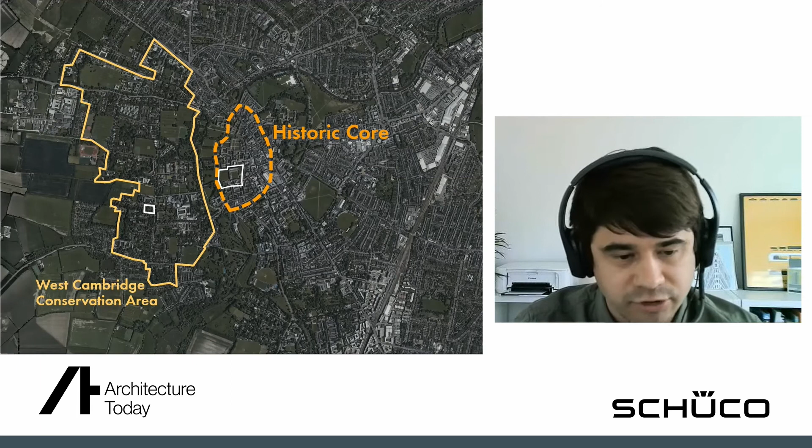Another aspect that significantly impacted the project was its location in West Cambridge and within the West Cambridge conservation area. Now, development within conservation areas is strictly controlled through planning. Planners need to balance the benefits of development within the conservation area against the potential harms to the conservation area. And on this basis, the original principle for development on the site was rejected outright.

We had an initial planning application that was refused both at committee and appeals, so the subsequent planning application that was accepted needed to very carefully consider the conservation area, designing it sensitively to ensure that no harm was created to the wider conservation area through the proposals.

Now, the location is particular to this project, but this challenge is general within the construction industry. Within the UK, there are 10,000 designated conservation areas, taking up about 2.2% of the total land mass, meaning that the construction industry as a whole needs to grapple with whether Passivhaus can be adapted to respond to different conditions that require different aesthetic responses.

Is Passivhaus a square peg trying to fit through circular aesthetic holes, or is it something that can be manipulated through detailed design in order to provide the variations in aesthetic that might be suitable for different locations? The aesthetic that was particular to this location was responding to the arts and crafts development that happened in the late 19th century, red bricks, white windows, clay roof tiles, which is very representative of West Cambridge as a whole.

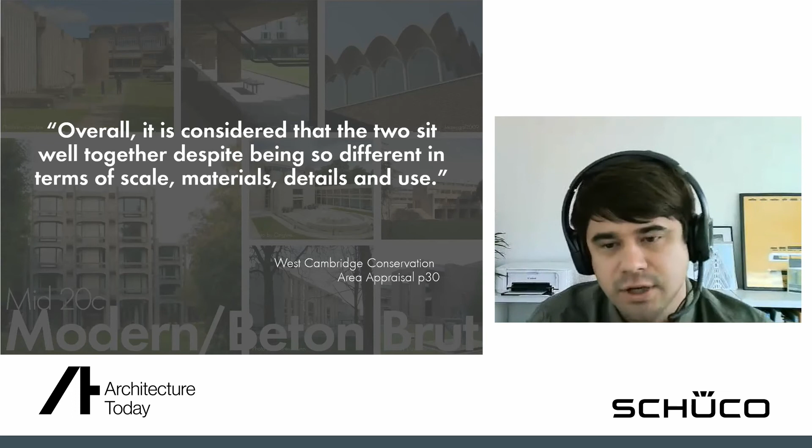And this combines in West Cambridge with mid-century modernist buildings that came from typically collegiate and university clients. So the architectural approach that we took to the project sought to balance these two aesthetics that within West Cambridge are generally considered to sit well together, despite being so different in terms of scale, materials, detail and use.

On this basis, we observed the site as it stood, containing two existing buildings, Cranmer Lodge and Grasshopper Lodge, both formal fronted arts and crafts villas, red brick, white windows, clay roof tiles, and tried to introduce a new villa building that continued the rhythm of arts and crafts villas along the southern side of Cranmer Road, looking onto Cranmer Road, filling what we perceived as a gap in the back garden of the Grasshopper Lodge site.

Here we can see the completed buildings responding to the tones, textures and forms of those arts and crafts villas, red brick, white windows, clay roof tiles, and sitting in a complementary fashion with the existing buildings on site.

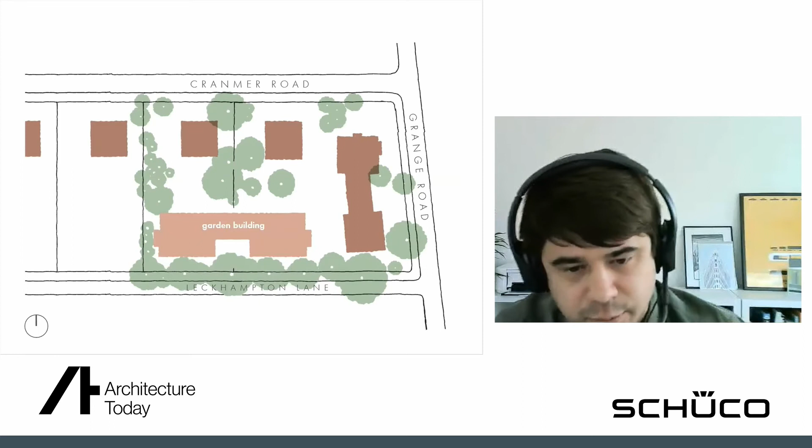And then to the south of the site, up against the leafy Leckhampton Lane, we introduced a distinctly different building, a building that was responding to the modernist heritage of West Cambridge, using white framed precast concrete facade to hold red terracotta baguettes that again gently touch on the tones of the arts and crafts villas, and windows providing light to study bedrooms. On the south side of the building, there's a captured courtyard around which common rooms and kitchens sit. And this is a view of that courtyard from Leckhampton Lane.

On the corner most visible within the conservation area, we took the opportunity of the stair to provide a slightly more playful aesthetic with a cantilevered precast concrete roof and glass-to-glass corner.

And importantly, between these buildings, external spaces were framed, secret gardens, formal gardens, allowing everyday interactions between students living on site to occur, and trying to really create that sense of community with kitchens and common rooms all opening into the garden spaces. Here within the garden building, a common room sitting between the principal garden space and the smaller courtyard. And here on the north side of the garden, a common room associated with the villa building.

So the challenge for us through detailed design really became balancing this aesthetic, the expressed masonry facades and expressed structure, with the performance of Passivhaus, questioning whether that performance can be achieved with the aesthetic we were looking for. And what I'll do now to conclude my portion of the presentation is walk through a few of the details that were developed to try and achieve that performance while also achieving the aesthetic intent.

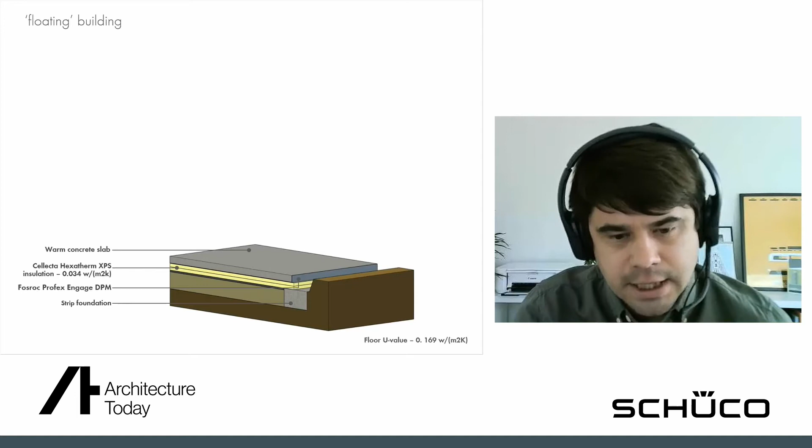Starting at the foundations with the warm slab that was developed. This solution essentially is a floating foundation solution where a warm concrete slab sits above rigid XPS insulation that then bears down on the shared strip foundation around the perimeter of the building. This was developed in response to buildability requirements and also thermal requirements. This is a thermal analysis of that detail, confirming that it actually provides a thermally bridge-free method of construction.

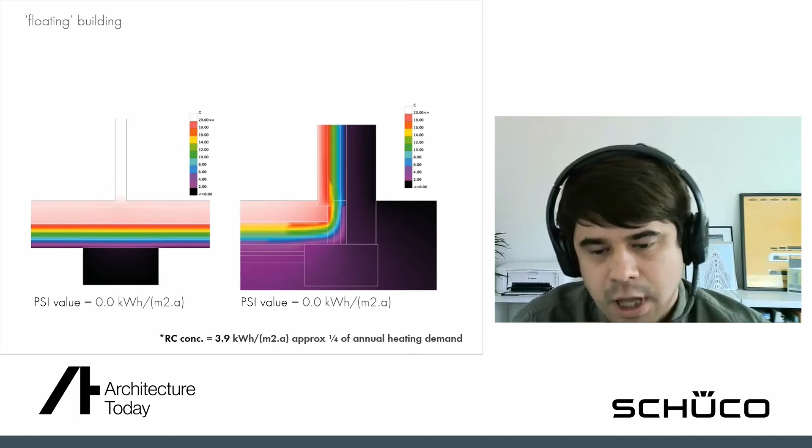And when we looked at the energy savings that would be associated with that, we identified a figure of 3.9 kilowatt hours per metre squared per year, which actually in a Passivhaus project represents a significant amount of the annual heating demand, a quarter of the annual heating demand. So this quite invisible and subtle detail unlocks a great improvement in terms of the energetic performance of the building as a whole. And here it is on site with sand blinding, XPS insulation, damp proofing and formwork for the concrete.

On top of this foundation solution, we located a low carbon CLT superstructure for the building. We employed this as the principal airtight line for the building as a whole. Now, obviously in Passivhaus buildings, airtightness is incredibly important. So we used this CLT simply by taping the joints between panels and taping the windows into that CLT structure. This had three benefits. First of all, it ensured that the responsibility for the airtightness sat within few subcontractor packages, the provision of the CLT and the provision of the windows.

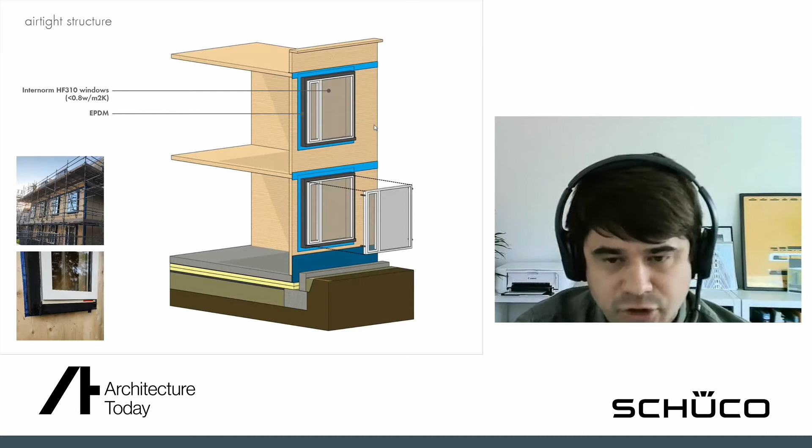Secondly, it meant that at a very early stage in construction, we could get an assessment of the airtightness of the building as a whole. And finally, it meant that the airtightness line itself was incredibly robust, so follow-on trades were unlikely to damage or penetrate the airtightness line. And for these reasons, we achieved an incredibly low airtightness level for both buildings, 0.16 and 0.19 air changes per hour, significantly better than the 0.6 maximum that passive house works to.

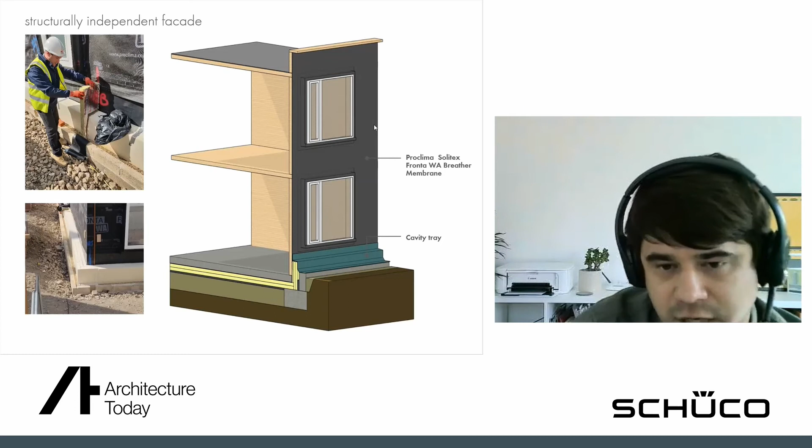The final point I'll make is about how we supported the quite heavyweight masonry facades off the CLT structure itself. Obviously, on typical buildings, you'd expect a significant amount of secondary steelwork to tie that external cladding back to the superstructure. But in this case, we took the load straight down onto the shared strip foundation at the bottom of the building, just employing lateral restraints to stop that exoskeleton from essentially falling forwards.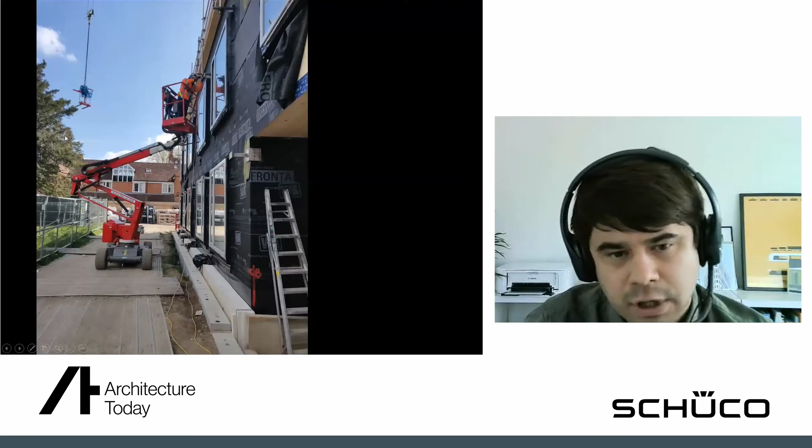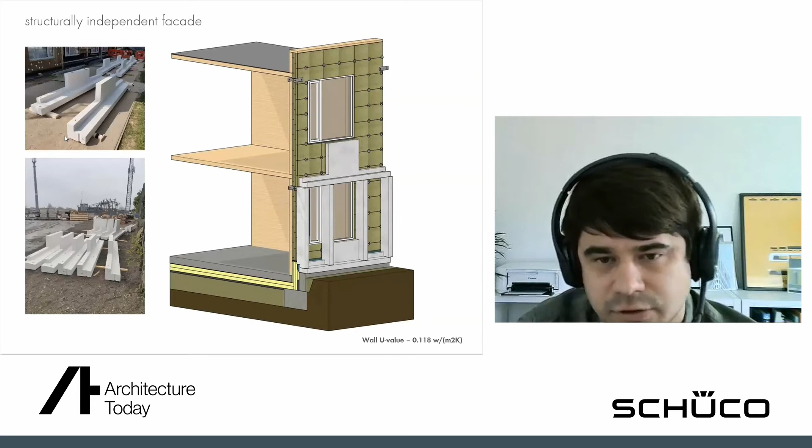This is some of the bracketry being installed, and another benefit of it was that we could insulate the entire facade before the external cladding was installed. This meant that we could check the quality of the insulation before any external finishes went on, and then the external finishes themselves were very simply installed in place sequentially. And here's the eventual effect.

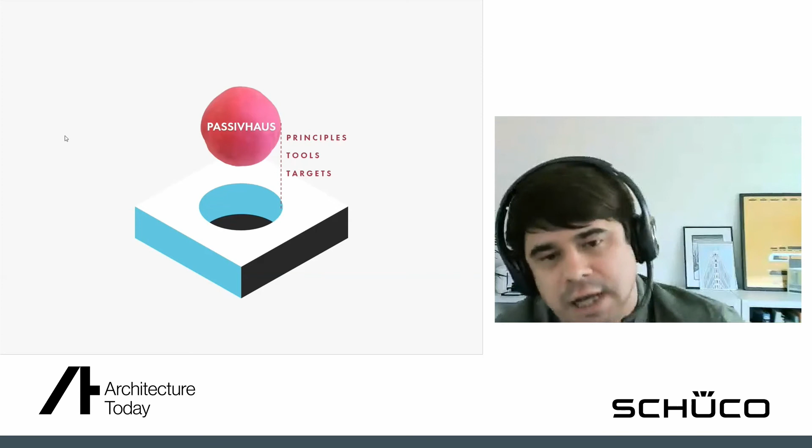So what we discovered through that design process really was that Passivhaus didn't represent any impediments for the aesthetic effects that we were looking to achieve.

It offered a series of principles to work to, a series of tools that we can use to check we're going to achieve the energetic performance and some targets to work to. But then design really could start in terms of the detailed design for the buildings. I'm going to hand over to Gwilym, who's going to talk through some other aspects of the scheme.

Thanks, Matt. So I'm going to have a run through then of some of the high-level decisions we made for the scheme, particularly around the choice of fuel source, some of the medium-level decisions around system strategies and things like that, and then one or two examples just down at the detailed level of component selection, a brief discussion about some of the post-occupancy evaluation we've carried out, and then our conclusions and reflections on the scheme as well.

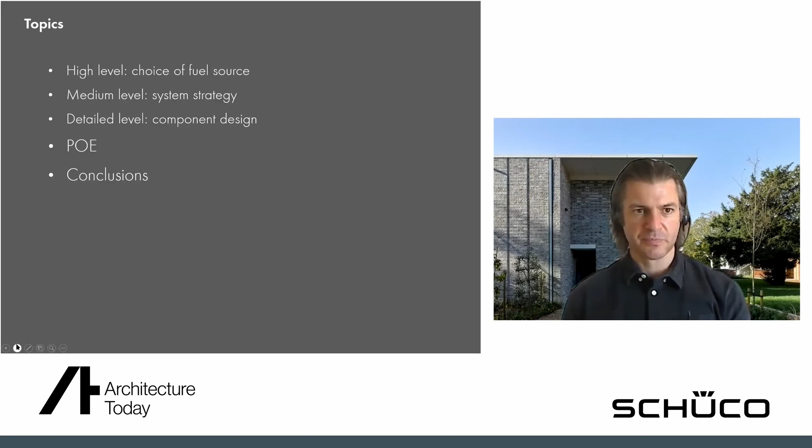So the first one then is a choice of fuel source. So coming into this, we knew that Kings are a good client and are used to holding buildings and maintaining them for a long time. And so we're looking at the carbon intensity within the UK of electricity versus gas. The graph here is showing the historic trend of figures of carbon intensity of electricity dropping. You can also see in the dark blue the projected intensity of electricity going down to something pretty low in the future.

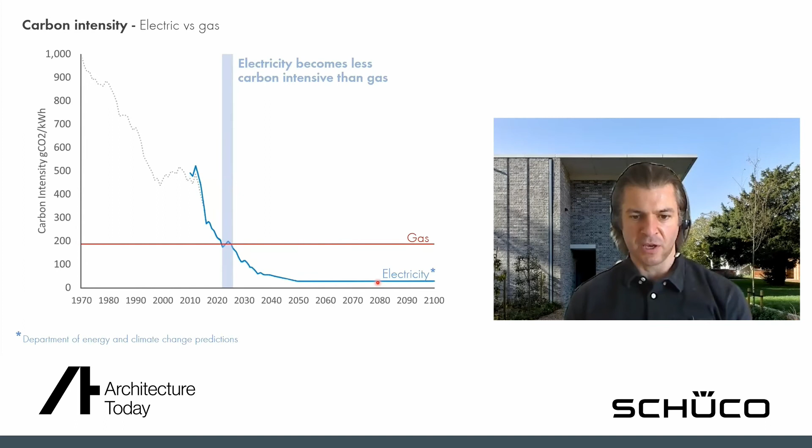And when you compare that to gas, which is likely to be pretty stable, all hydrogen discussions aside, then it was clear that around early to mid 2020s, you get a tipping point where electricity was lower carbon than gas. And this is the building design life. So even if at initial handover electricity would have been a higher carbon fuel source, for the overall life of the building, electricity made much more sense, and that's why we went for it.

Interestingly, this is the carbon intensity that building regs would have us use in compliance modelling for electricity at the time. So it was only really the very low energy consumption that Passivhaus has which enabled this as a strategy. We wouldn't really have been able to do the same thing on a conventional scheme.

Then for some of the individual services strategies, so for domestic hot water, we're interested in several things really. We wanted something that was simple, that minimised distribution losses and the risk of overheating, obviously used electricity, and that limited any wastage as well as minimising demand.

So we went for a strategy which has point of use instantaneous water heaters, micro bore pipework running out in radials to each appliance, low flow sanitaryware, particularly the showers were less than 6 litres a minute, and that was followed through into wash hand basins and so on. And then wastewater heat recovery as a simple passive means of recovering some of the waste energy that would otherwise have gone down the drain.

For the ventilation side of things, again, we try to keep things simple. There's two different strategies for the different characters of the building and the different usages of space within them. So for the villa building, we've got something which is very much like the cascade type system which you would have on a Passivhaus house. So we're serving the building, which is 19 bedrooms, with 2 of these domestic scale ventilation units.

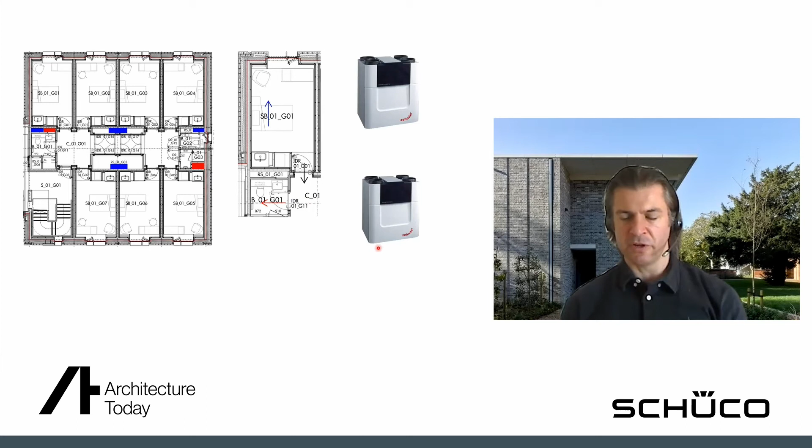And on a typical floor plate, that means we're supplying fresh air into the bedrooms, we're transferring that air from the bedrooms into the communal corridors, and then we're pulling that air from the communal corridors through into the places which need air extracted from them, so the toilets, the WCs, the store cupboards, and the kitchens as well. That approach has let us then limit the total ventilation rate that we need for the building, and it's also let us serve the whole building with a couple of units and some very, very simple controls that just run at a fixed flow rate.

The garden building is slightly different because all of the bedrooms there have en suites, and so all of the en suites need extract ventilation from them. So the general approach there for a typical student bedroom is we supply fresh air into the bedroom, we transfer it through a door undercut into the shower, and we pull the air out of the shower.

And we've gone for a decentralized system here, so the cyan blobs you can see across here represent the locations where those MVHR units are, just on the top floor. And again, we've gone for 2 different models of domestic style ventilation units here, again with fairly simple controls. So there's 3 of these ones which do the common room and the kitchens, and then there's 10 of these individual units which serve groups of clusters of 4 bedrooms.

One of the details, this is an illustration of a wider principle we found interesting, was really looking at the energy consumption of ancillary mechanical and electrical systems, which doesn't normally get dug into that much. So for the access control systems, we looked at those and looked at what we thought their operational energy consumption would be. Here's a couple of figures showing you typical Passivhaus heating energy limits and an indicator of the total energy limit for the building.

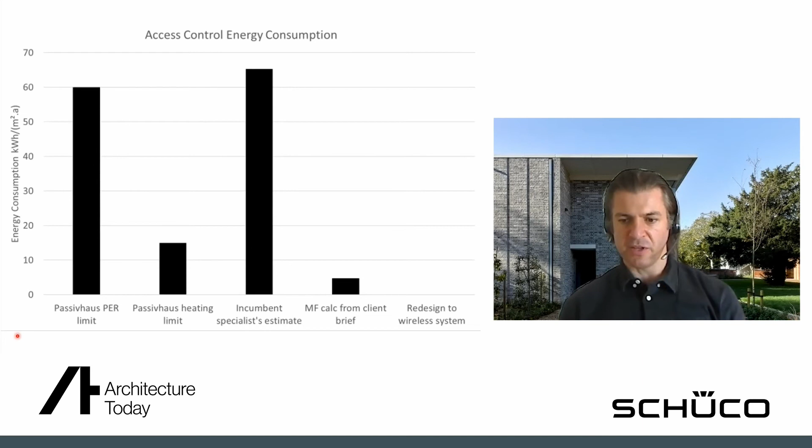When we spoke to the incumbent access control specialist and asked them to estimate the energy consumption of the access control system over a year, they gave us something like this. And after we concluded that we couldn't really heat the building through access control, we did some separate calcs based on information from another manufacturer and got to a figure somewhere more like this. So obviously that's a lot lower, but it's still around 1/3 of the heating energy for the building and a reasonable chunk of the total energy use. So we redesigned that system to get back to a wireless system, which brought us down here. So we're down at about 2% or so of the annual energy use of the building.

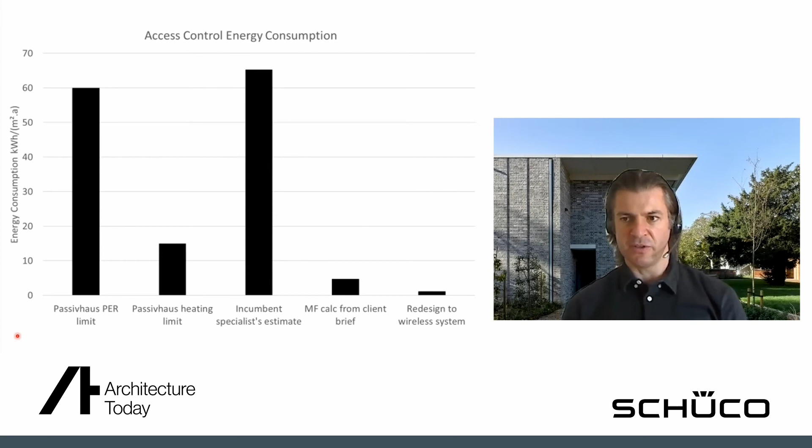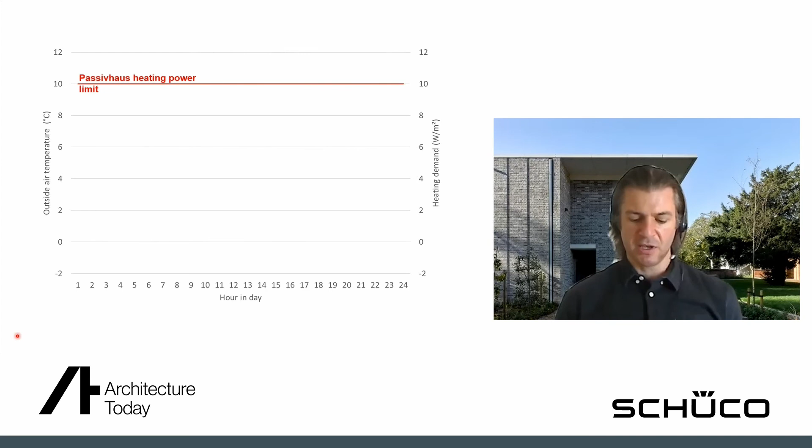We've carried out post-occupancy evaluation on the building, both from taking meter readings and evaluating them and comparing them with weather data, and also from using a BUS methodology survey and obviously direct feedback from the clients. For the POE, this is the Passivhaus heating power limit, so 10 watts per square meter, and that's tested in PHPP, the design tool, against 2 different weather conditions.

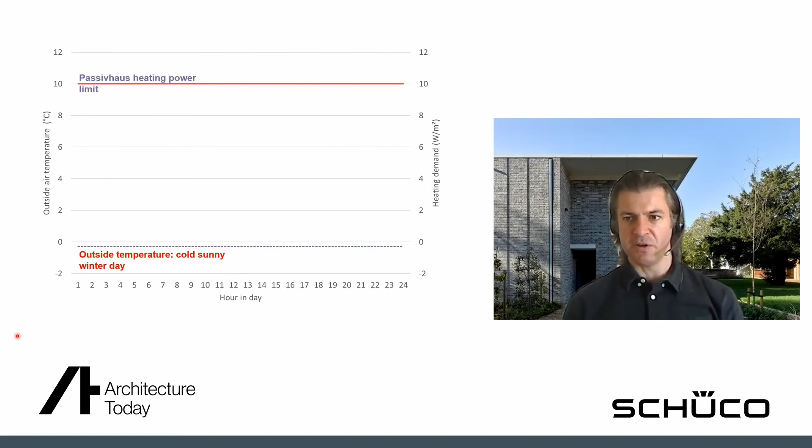So a cold sunny winter's day, shown here, where it's pretty cold but you've got some sunshine coming in and warming up the building, and then a slightly warmer but still cool day where it's overcast and there's very little sunlight around. We found the day with the highest heating power consumption. This is what the outside air temperature looked like on that day, and the average was between those 2 conditions, so we thought that was a fairly good test. And we've got from the electrical meter data the hourly heating loads, which averages out to just under 8 watts a square meter. So we're happy from that. It's demonstrating the reality is matching up to the modelling and the predictions.

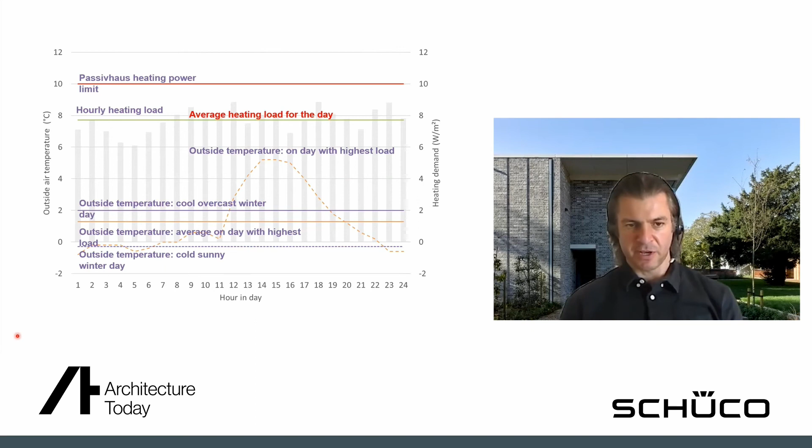We did find one challenge, which was the feedback from the college that the student expectations in wintertime were flip-flops, shorts, t-shirts, wandering around and wanting the temperatures cranked up a bit higher. And also we had some feedback around shower durations, where I think the PHPP assumptions for shower duration are not entirely accurate for a community of graduate students. So there's plenty who had 20-minute plus showers, and we knew that because the run-on of the presence detector in the en-suites would turn the lights off after 20 minutes.

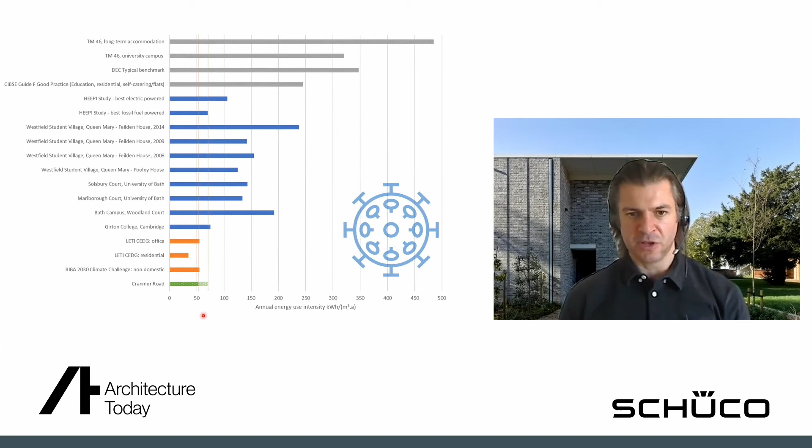We've compared the energy consumption against some industry benchmarks at the top in grey, other precedent projects that we found data for, so these are real individual buildings, and then in orange some of the climate emergency targets, so the LETI targets from the Climate Emergency Design Guide and the RIBA 2030 Climate Challenge for a non-domestic building. Obviously the comparison has been complicated a bit by a global pandemic while we've been taking the metering and the building usage changing. We think that we're somewhere in this range between the dark green and the light green. So either hitting those LETI and RIBA targets or as good or slightly better than all of the other precedent projects we've been able to find.

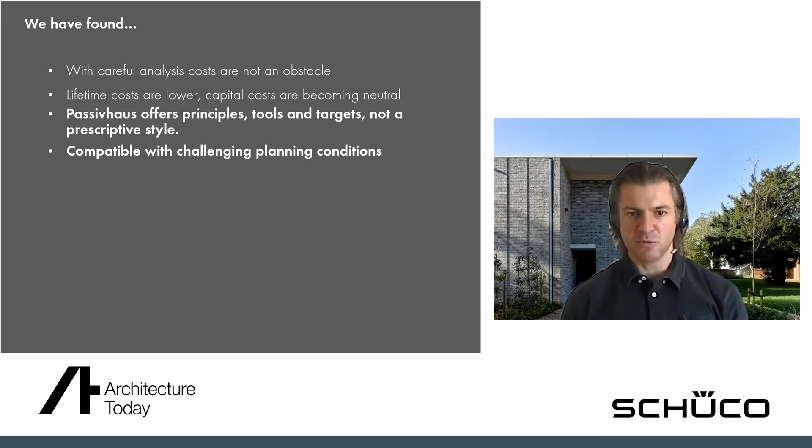So I think that brings us on to our reflections and conclusions. On the cost side of things, which often gets talked about, we found on other recent projects, cost isn't as much of an obstacle, and actually the lifetime costs are lower and the capital costs are becoming much lower or neutral. Passivhaus gives us some principles, tools and targets then, but not a prescriptive style, and so it's been compatible with these really challenging planning conditions.

We've achieved Passivhaus using largely standard UK construction materials, so there's options for scaling up there. We're not using something that's very esoteric and only rarely used. We've delivered an all-electric scheme, and there's a number of ways of doing that. It's been delivered with a design team with limited experience, so I think it was Allies and Morrison's first project, it was Smith & Wallwork, the structural engineer's first project, it was one of our first, not quite the first, but very early.

Passivhaus has been good because it's promoted this early analysis of buildability and sequencing, and it hasn't relied on experienced main or subcontractors. So several of the key subcontractors involved in the scheme didn't have Passivhaus experience beforehand. They still delivered that excellent air tightness that Matt showed earlier and all of the other things that go with it. And also from some of that POE, it's difficult to accurately predict human behaviour.

So I think our response to the initial question for this webinar was saying, well, yes, Passivhaus can and will go mainstream. If we're going to hit the climate emergency targets that we're setting, then that's needed. And the interesting discussion to go with it, I think, is what else do we need to be doing to deal with things like soft landings, embodied carbon, etc.

So just before we wrap up, we'd like to say thanks to a lot of the other collaborators on this scheme. Matt and I are only part of a much wider team. So Kings is the client, RG Carter is the main contractor, Warm is the Passivhaus certifier, Smith & Wallwork structural engineers, and Faithful and Gould, who are the QS and the project manager. So thanks very much. If people have questions, then we're happy to either field them now or take them later on instead. Thanks.